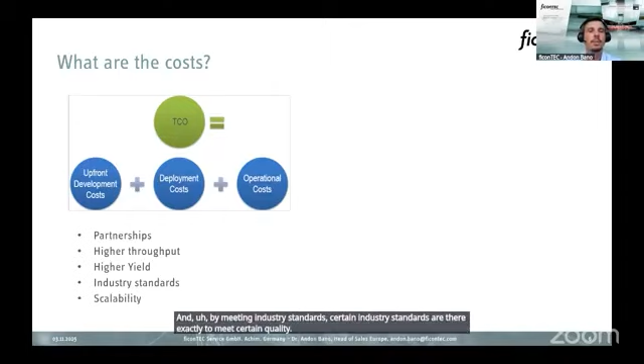We could work on reducing such costs by developing different partnerships, by having higher throughput, so higher volumes. Of course, the price per part will drop, by having a higher yield, so we have more efficiency in material usage, and by meeting industry standards. Certain industry standards are there exactly to meet certain quality, and also by making sure that our processes and our technology is scalable. And we believe that automation actually is key to all this and could help drive scalability from day one.

So when we see cost versus time, of course, manual might seem more attractive because you might be able to do something in your lab with one person and a few tools. And then investing already from day one in automation might mean that you have to buy an expensive machine and probably spend some time on it and so on.

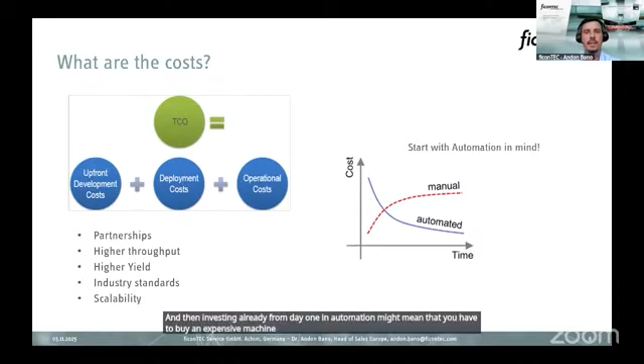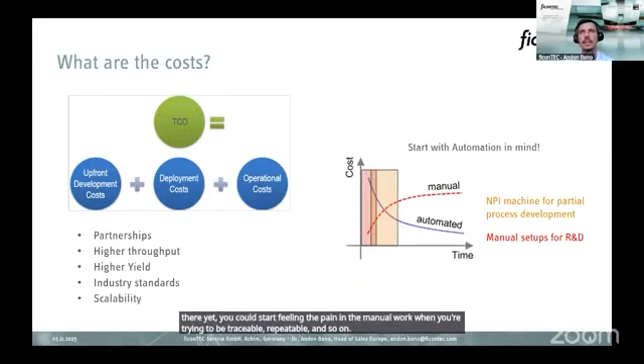But over time, this cost breaks even. So practically when you are at the prototyping level or maybe product releases and so on, new product introduction, then maybe manual and automated costs will start to break even because then you want to be quick in pivoting, you want to be reliable, you want to be repeatable and so on. Even though the volumes are not there yet, you could start feeling the pain in the manual work when you're trying to be traceable, repeatable, and so on, still in the low volume but high mix product.

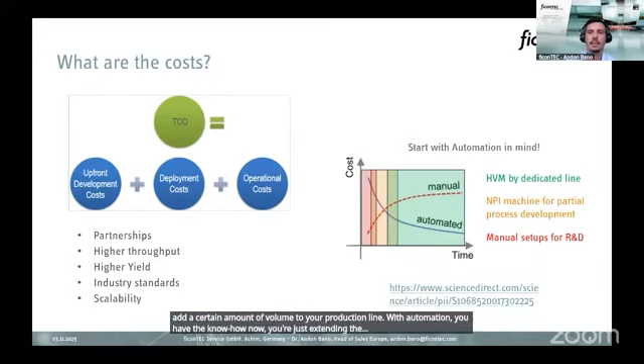And then it's clear when it comes to high volume, automation will have much lower cost compared to manual because it's scalable. By scalable, I mean that you don't have to actually hire a new person every time you want to, let's say, add a certain amount of volume to your production line. With automation, you have the know-how. Now you're just extending only the hardware to do that.

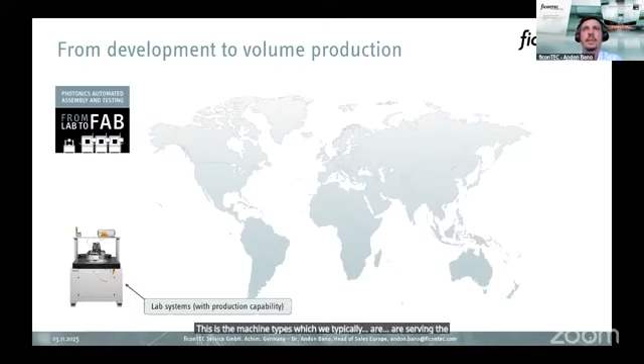So having this in mind, ficonTEC is there to help customers starting with automation in mind already from lab systems. This is the machine type which we typically are serving the market, serving our universities, research partners, some startups, but also sometimes R&D labs within big players in the industry.

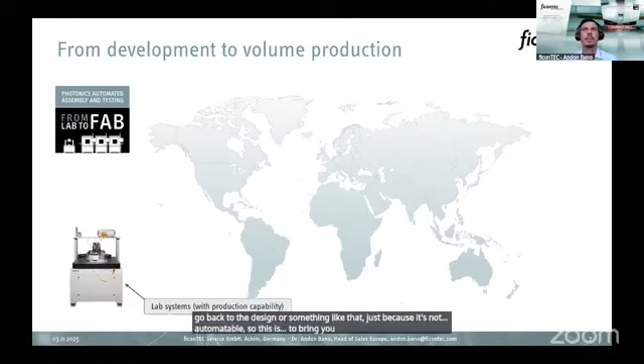So this is a machine which is made for prototyping, but with some production capability, still in a semi-automatic way. You could use this to keep your IP internal, to make quick pivoting, to change your products fast, and to try things already to make them automated, proven from day one. So you don't want to develop something and then just discover later that you have to go back to the design just because it's not automatable. So this is to bring you into the topic of designing for automation.

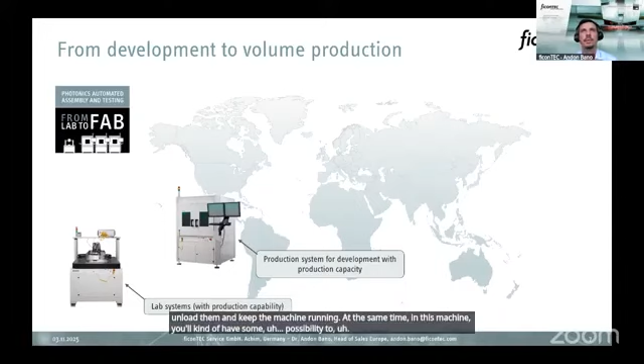The second type of machines that we're offering increases a little bit the level of automation. This is a closed door platform where you could already move into batch production. It's made for production, for volume, but at the same time there is some human interaction. You need an operator to prepare some trays, load them, unload them, and keep the machine running. At the same time, with this machine you'll have some possibility to repurpose it, to change your products. Maybe not every day like in the first machine, or every week, but still every couple of months, every few months. This is a machine that allows some development capabilities.

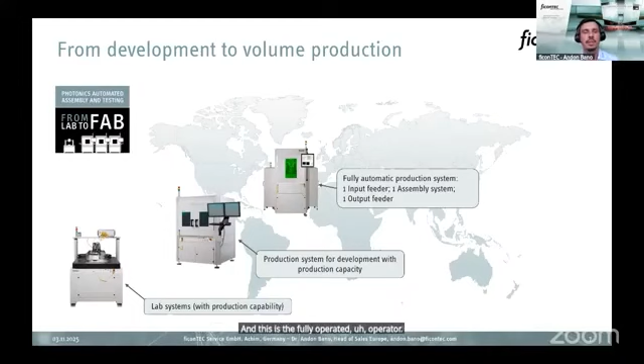The next step of automation that we want to reach, and actually we have reached at several industries, is high volume manufacturing inline business. This means that practically you could load only raw materials in front, and then you would get fully assembled and tested packages on the other side. We have done this already in the automotive industry, where the standards are quite harsh, for LiDARs, cameras, and sensors for the automotive industry quite successfully. And we're ready now to develop the same path for the AI demands.

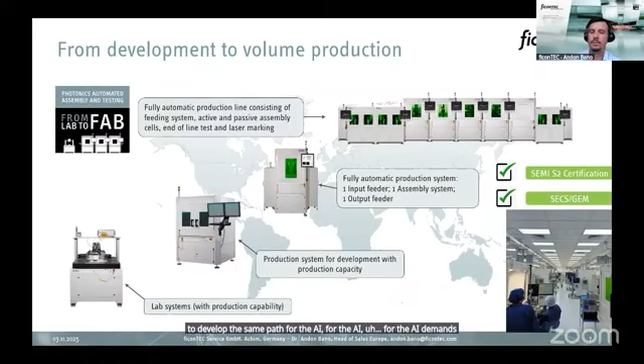From this point on, I will show you a few technologies we have been working on lately. Let's start from: in terms of photonics, what is AI demanding from us? What are these optical engines, and what do they require from the technical standpoint?

Starting from the wafer level, wafer testers have been around for quite some time in photonics. But ficonTEC this year just launched a double-sided wafer tester for COUPE technology, where electric chips are on one side and photonic chips are on the other. You can do simultaneous dual testing within the same machine, which is also compatible with automatic test equipment, ATEs, standard ATEs that OSATs and foundries are already familiar with in the semiconductor industry.

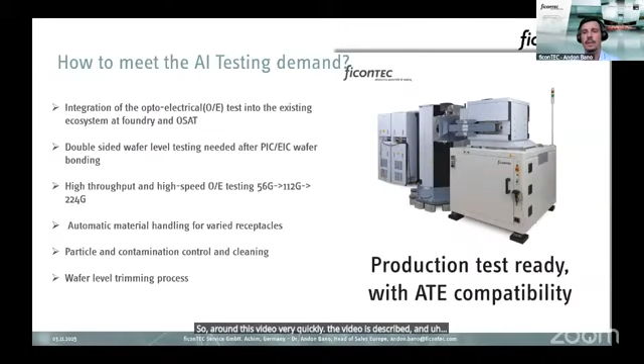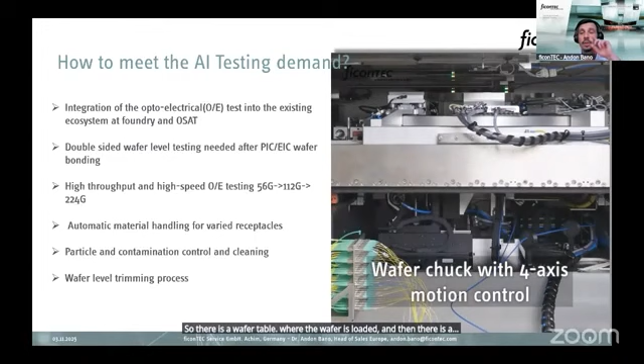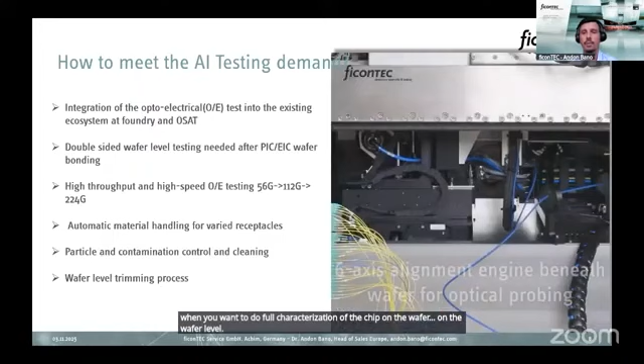I'll run this video quickly. It shows a bit of the architecture of this machine. There is a wafer table where the wafer is loaded, and ATE compatibility comes from the top. This is very important for high frequency small signal analysis when you want full characterization of the chip at the wafer level. From the bottom comes the 6-axis alignment engines with photonic active alignment for optical probing, which can be both edge and grating couplers.

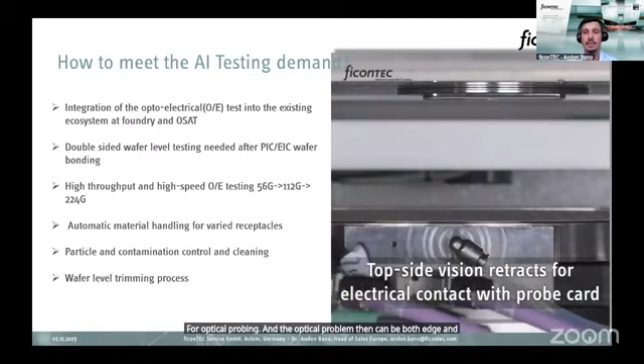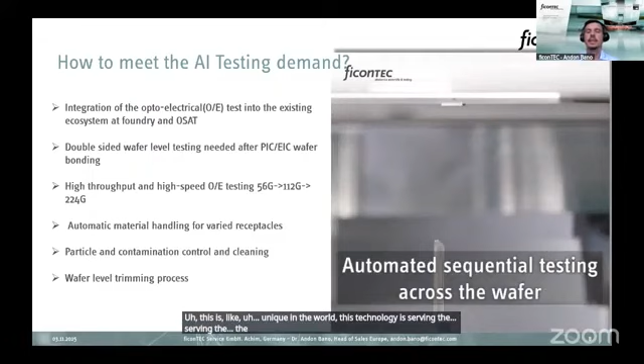This is unique in the world. This technology is serving the double-sided wafer tester. The same techniques can be applied for single-sided, electro-optical or only optical testers at the wafer and the die level.

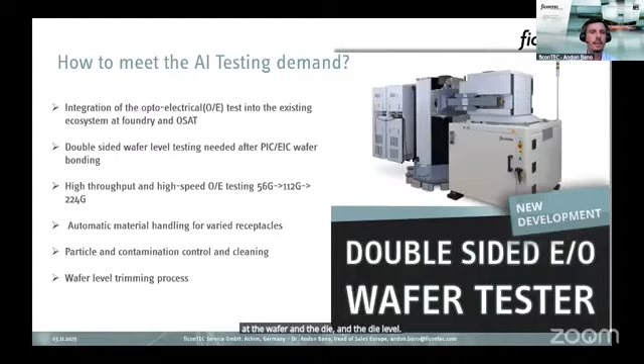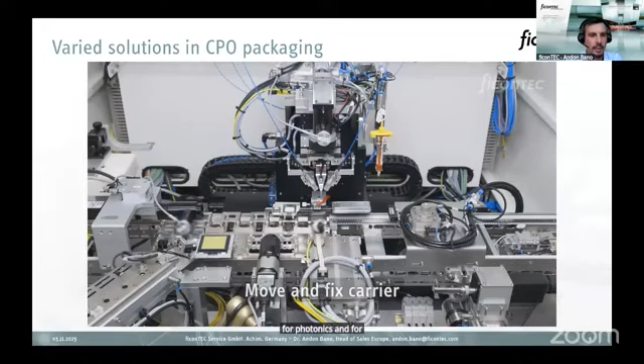What else is needed - here's another video showing another part of the value chain that ficonTEC offers. We do not offer only testing, but the full chain from testing until full packaging. Here you see a few dedicated steps for optical assembly and testing for photonics and AI applications. Let me run the video.

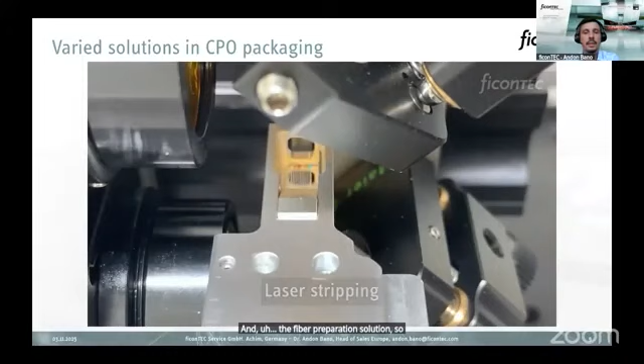First, this is free space alignment of lenses or micro lenses in front of photonic chips or lasers - an active alignment process. The second is FAU attachment, and then you'll see some fiber preparation: laser stripping, followed by connectorizing.

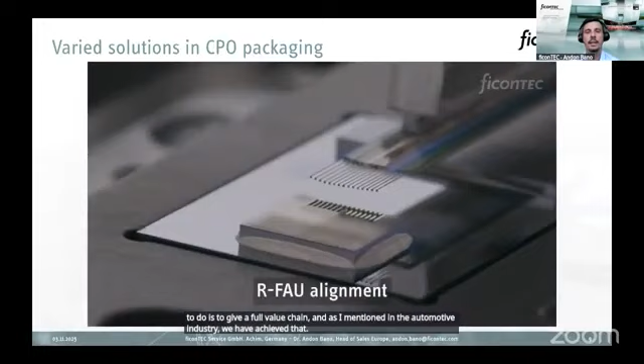What ficonTEC is aiming to do is give a full value chain. As I mentioned, in the automotive industry we achieved that by loading raw materials - starting from the package, plastics, optics, sensors, electronics - all up front, and producing a packaged LiDAR every few seconds as output. We want to achieve the same for optical engines.

This means that so far we can automate fiber butt coupling, automate free space alignment, automate wafer testing, but what we actually want is for the connection between the cells - these machines - to be done automatically.

We want a fiber preparation tool where you can put a spool of fiber, unspool it, strip it, cleave it, have prepared connectorized FAUs, connect them to another machine where you can grip these FAUs and attach them to your chip, and so on. This way you can go uninterrupted through a long chain of processes within the same line.

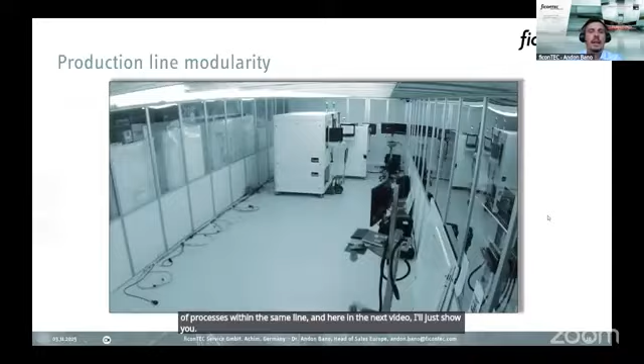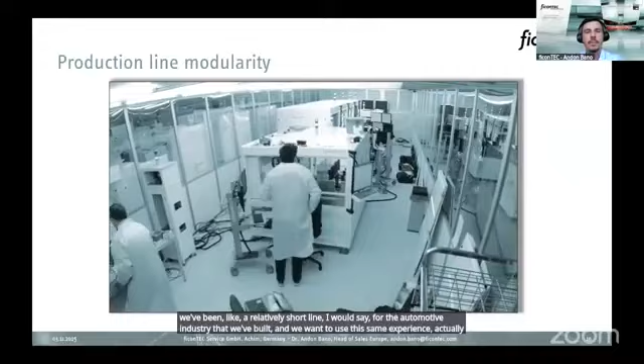In the next video, I'll show how we've been building a photonic line at ficonTEC. This is a relatively short line we built for the automotive industry, and we want to use this same experience in AI - we are ready to do that. We have all the needed parts of the photonic value chain.

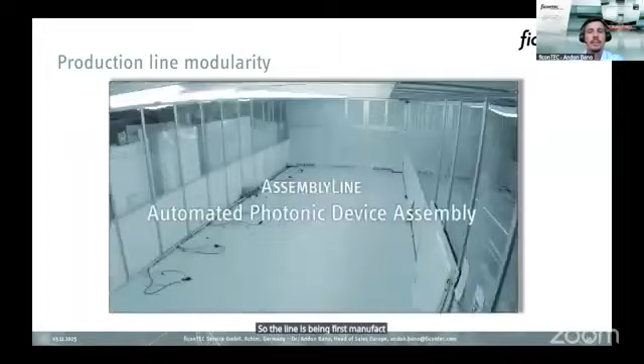The line is first manufactured at ficonTEC and tested there, then taken to the customer site for another test before it's ready for high volume production. But we are not only enabling AI technology with photonics - we also want to make use of AI, and here is an example I wanted to give.

So practically, what we want to improve, as a general scope, is the OEE, the overall equipment efficiency of our machines or power lines. And when it comes to high volume, this is very important. You can improve it by reducing downtime, by improving performance, and by improving the quality of the products that are coming out, so the yield.

And we have come up with machine learning algorithms which can act for predictive maintenance, but also for process optimization.

What this means is that the machine will be equipped with sensors and a separate PC which will be monitoring all the data coming from the sensors, from the axis, from the vision, from all the tools of the machine. And while monitoring continuously, the machine might automatically recognize, let's say, an axis is vibrating more than usual, or an axis is not able to reach the certain speed it has achieved in the past, and so on.

So like this, you can prevent a failure by already intervening, and the machine will slow down itself and call for assistance.

So we're using AI to increase the lifetime, but also, as I said, the OEE of our machines. And this is very, very important when you talk about high volume manufacturing.

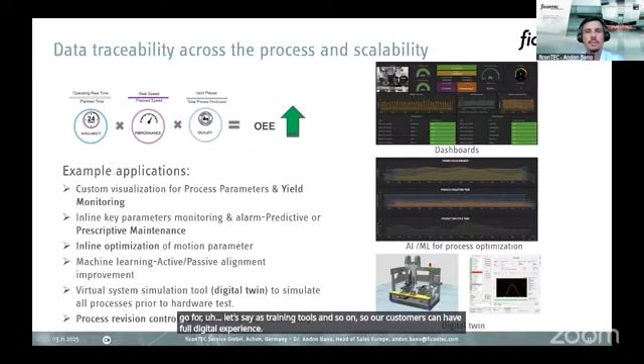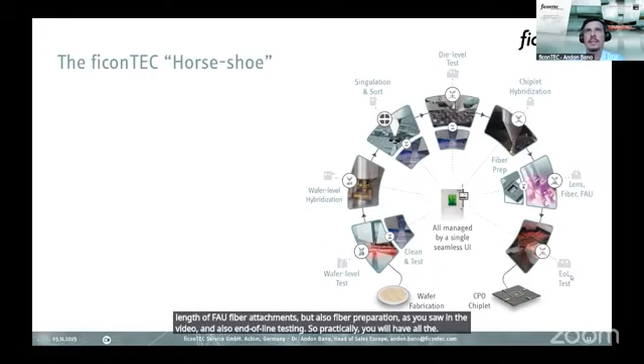But ficonTEC is able to offer you automated solutions starting from wafer testing and fabrication, from wafer testing and hybridization to die level testing, assembly, hybridization, combining different technologies, lens and FAU fiber attachments, but also fiber preparation, as you saw in the video, and also end-of-line testing. So practically, you will have all the assembly and testing cells that you will need for your final product.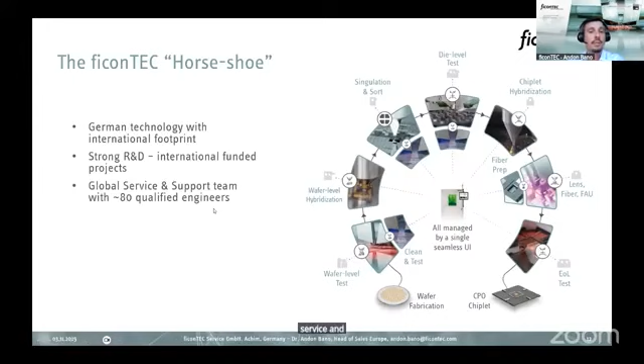It's a German technology with international footprint. We have a strong R&D team, a big global service and support team which is continuously growing, because as our machine base keeps growing worldwide, our service and support team has to keep the same pace. We have already more than 1,500 machines delivered worldwide.

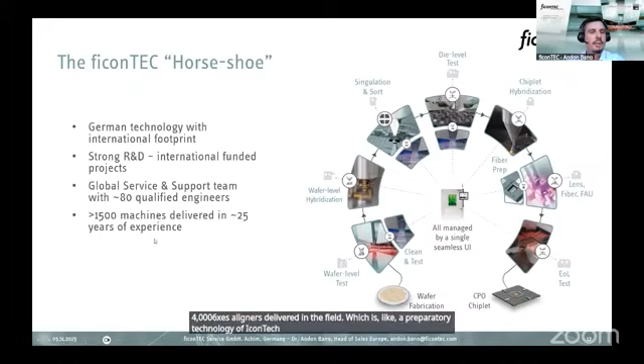And more than roughly 4,000 6-axis aligners delivered in the field, which is a proprietary technology of ficonTEC for active accurate alignment. And all of these technologies are served by the same software. So one software serves them all, which means you can reduce the training efforts on your team when you adopt ficonTEC technology.

We will help you, as mentioned before, starting from an NPI tool to develop the process together, have a test vehicle, go to a production tool, some training, and then be ready for high volume manufacturing. And this way, together with ficonTEC, you could reduce the time to market when you're scaling up and when you have a plan for scale up in the near future.

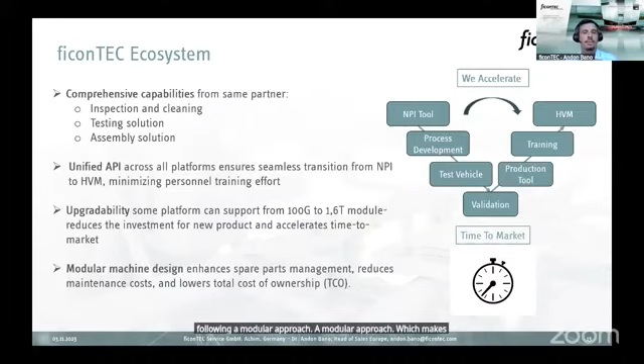Additionally, I would mention upgradability and future-proof technology, which means, for example, a machine capable to start with 100G up to 1.6 tera transceivers that has been in the market. So our technology is made to be future-proof, and we guarantee that by following a modular approach, which makes your investment future-proof and lowers your total cost of ownership.

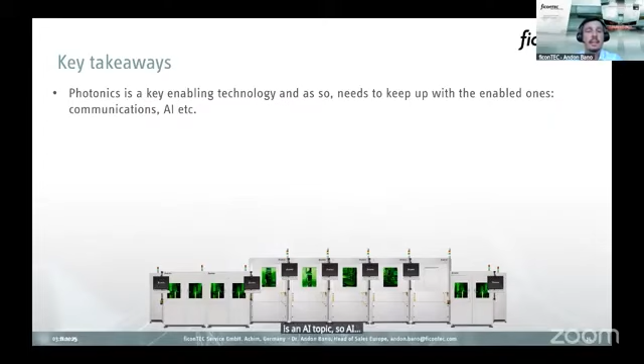Here I will summarize with a few takeaways. Starting from the beginning, I wanted to highlight that photonics is a key enabling technology, which means it has to keep up with the technologies it is enabling, which in this case is the AI topic. AI is having tremendous demand, which means photonics has to keep up with this demand. Automation, we believe, is key to reduce costs, increase volumes, and meet quality standards. And early adoption of automation will help you have an easier adoption and easier scale up.

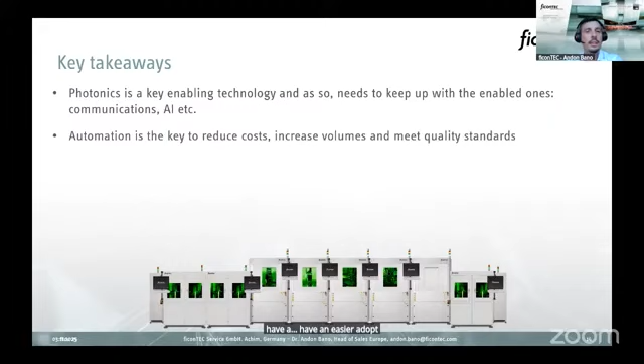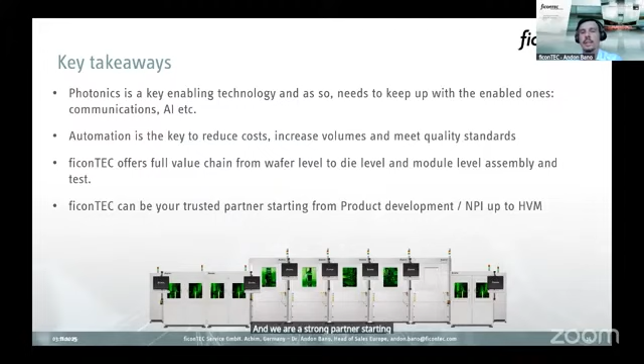ficonTEC will help you and offer you a value chain starting from wafer to die to module level, both for assembly and for test. And we are a strong partner starting from product development, NPI, up to high volume manufacturing. So with this slide, I will close, and please feel free to ask me any questions.